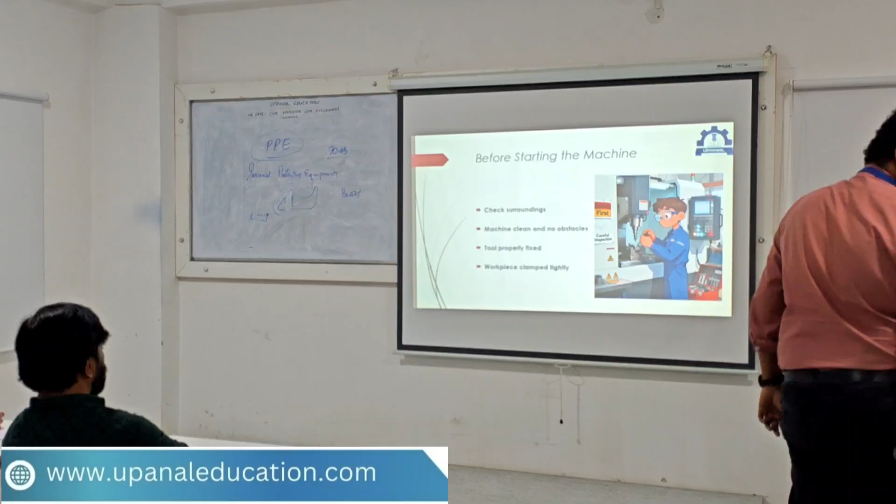Now, what should we do before starting the machine? Before we start any machine, the basic things we have to do are: first, check the surroundings. Why check the surroundings? What is the purpose? First, to see if there are any oil leaks, or any other issues. All these things have to be checked properly.

Then second thing, the machine should be clean. You might have seen the X and Y axis movement in the machine yesterday. If in that movement somewhere some chip or anything is stuck, this movement will be affected, because our machine has very fine accuracy - normally 5 micron accuracy. That accuracy will be affected if there are obstacles.

Then the tool which we load should be properly fixed. If it's not properly fixed, there are chances it may fall down, the tool may break, and the machine also may get damaged. Then we have to see that the workpieces are clamped tightly and properly, because otherwise what will happen - the cutter will come, start making the cut, and the workpiece will go its own way.

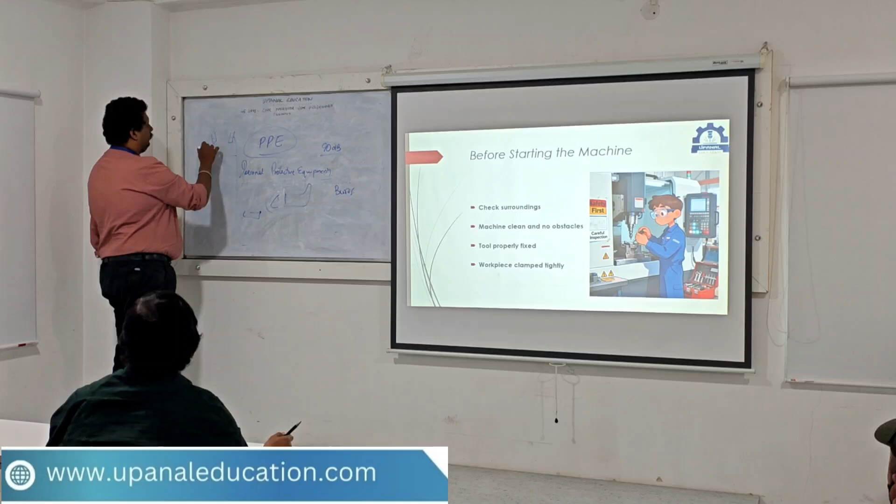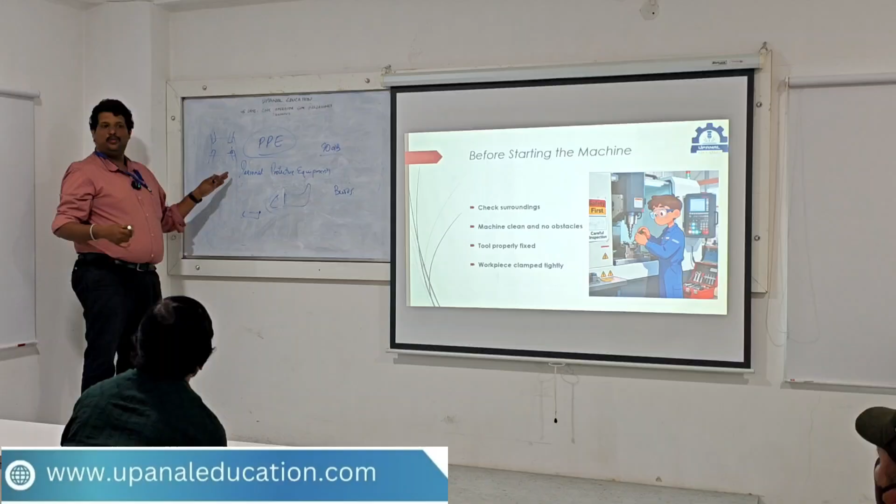Sometimes what happens? We will clamp the workpiece using clamps. But what will be the mistake sometimes? In our clamping area, the tool will have to go. Whether the tool knows there is a clamp there, the tool doesn't have any sensor. We are giving the instruction, go here, go there. Tool is following that way. When there is a clamp there, it will automatically go and hit it, and the tool gets damaged.

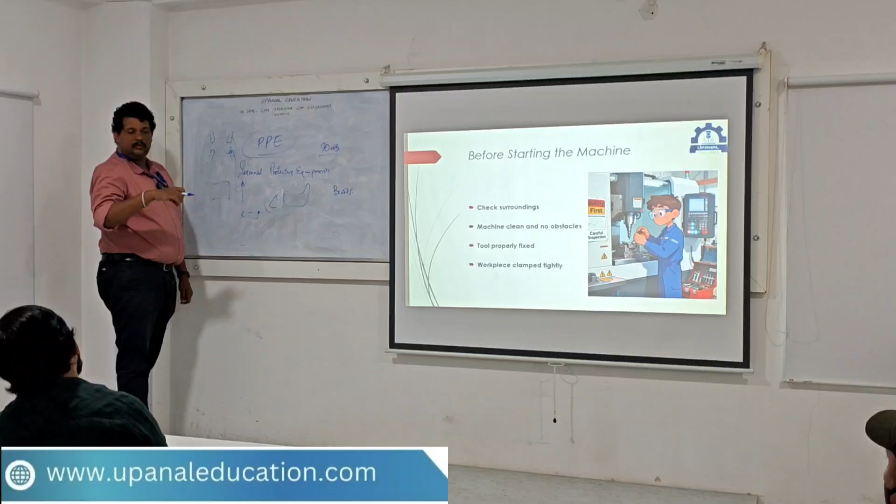Sometimes what happens? After the work, we will always lift the Z axis, so that it moves properly. There also, what will happen if you don't move sufficiently? If you don't move sufficiently, there are chances that the cutter may again break. I'll show you some videos of such errors. So these four things have to be taken care of importantly.

And what should you do during machine operations? During machine operation, when the machine is running, you have to always keep a good distance. See, how much ever we clamp, we cannot be sure. Sometimes the piece may fly, the job may fly and come to us, or even the cutter may break and come to us.

So what we will do? If this is the machine door, never stand straight in front of that. Even if the door is closed, stand to a side, with your one hand always near the emergency stop. Why? You have to be very careful about all the things. Any sound difference you feel, any vibration, anything you feel extra, not like normal.

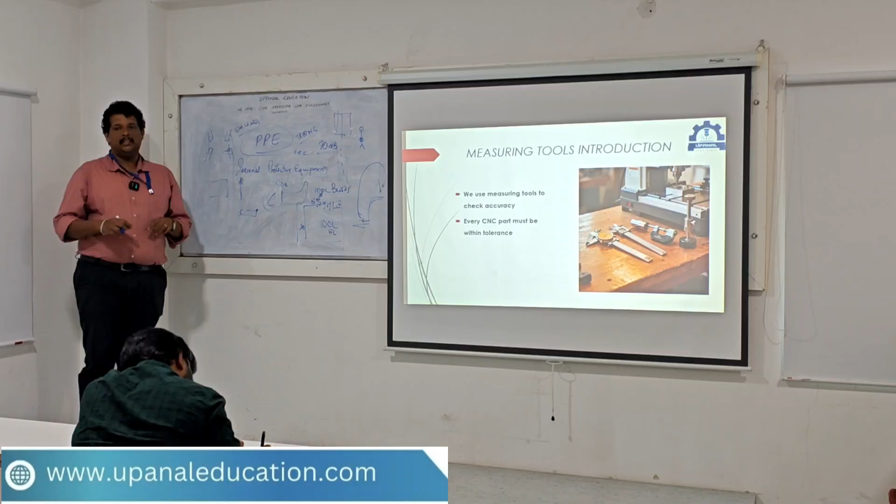Now, what is the most common measuring tool we have used? Vernier caliper - I am just asking the common thing, forget about the vernier caliper and all. Measurement tape, scale, normal scale we use. In the machine shop, we won't use a normal scale, we will be using the steel ruler, steel scale. We will be using only the steel scale, the plastic scales will not be used, we will be using the steel scales.

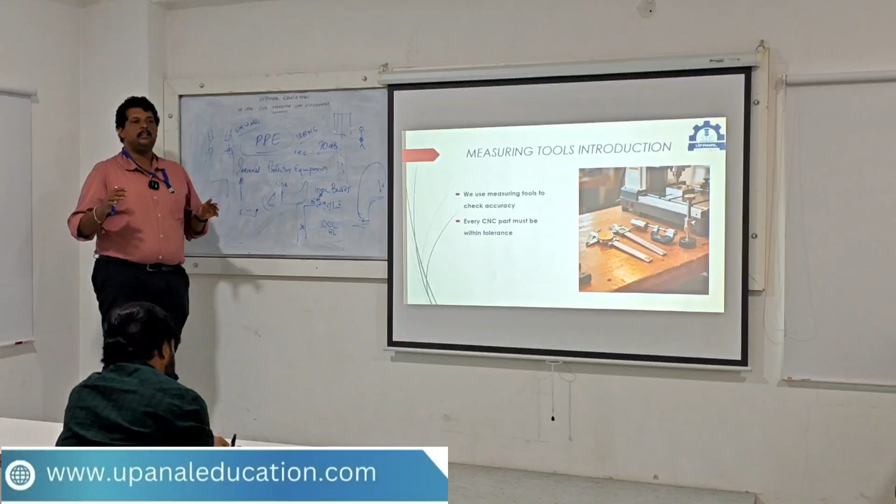So when you have a measuring tool, what we will do - how we will select a measuring tool? I want to measure something, how are we going to select the measuring tool?

Size of the work, one thing - yeah, based on size we will check. Then we are measuring the final product. If you are measuring the final product, finished workpiece, we will be using more accurate ones like the vernier caliper or micrometer or anything.

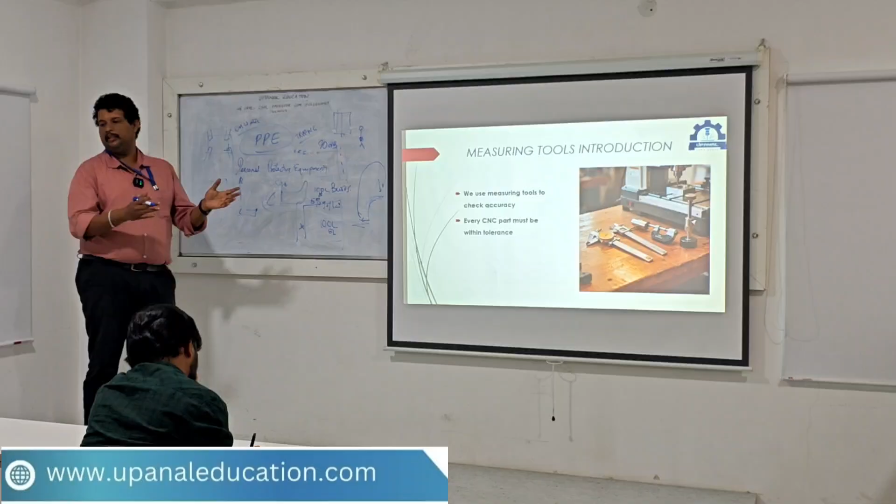But if we are just measuring the raw material - what is the raw material? The workpiece before the operation, before we start the operation. So should the raw material be accurate?

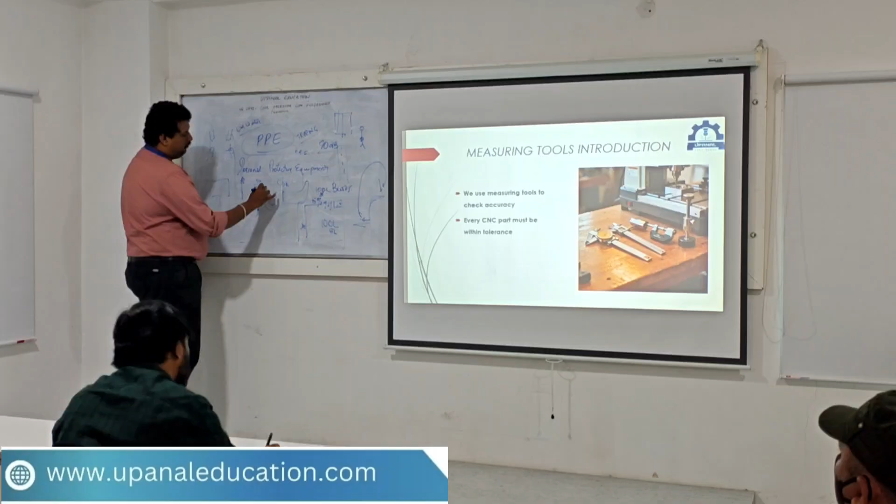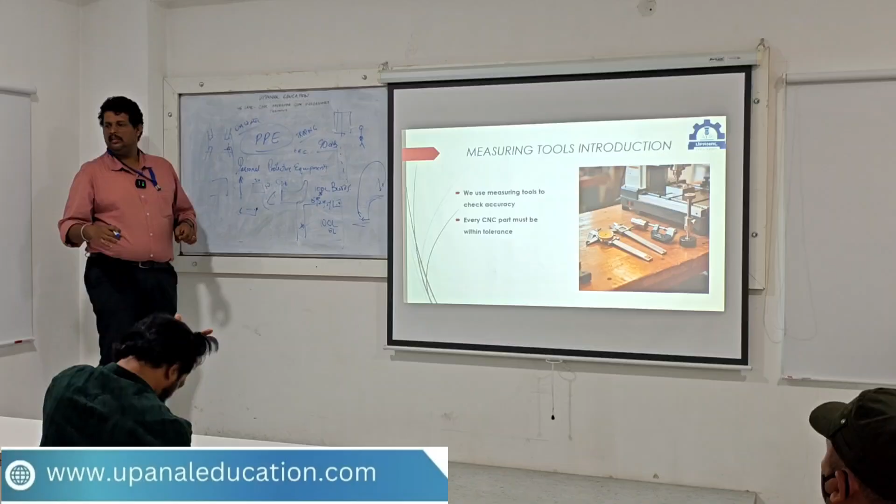So for those things we don't need a vernier caliper or anything, and we will be using the steel rule. The measurement we can take with a scale is the minimum required for this.

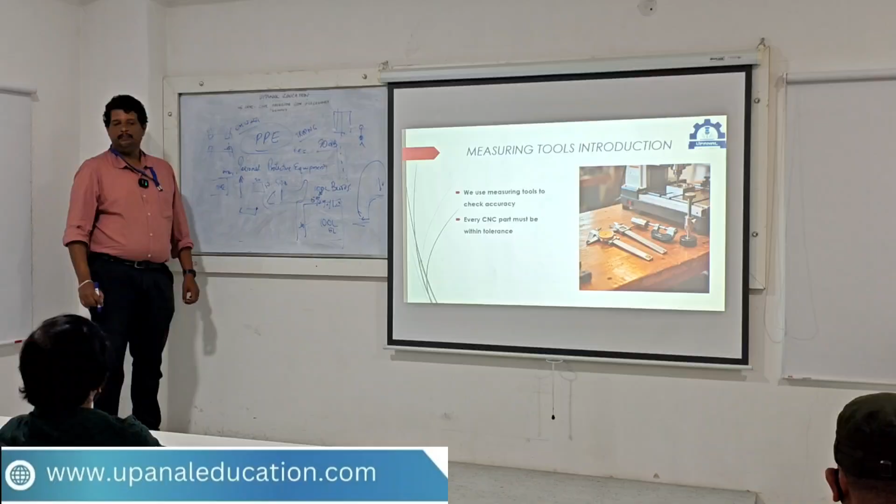Minimum, not maximum. 1 mm we can take. But in the vernier and all, the minimum we can take is 0.02. Now, yesterday I told you one thing.

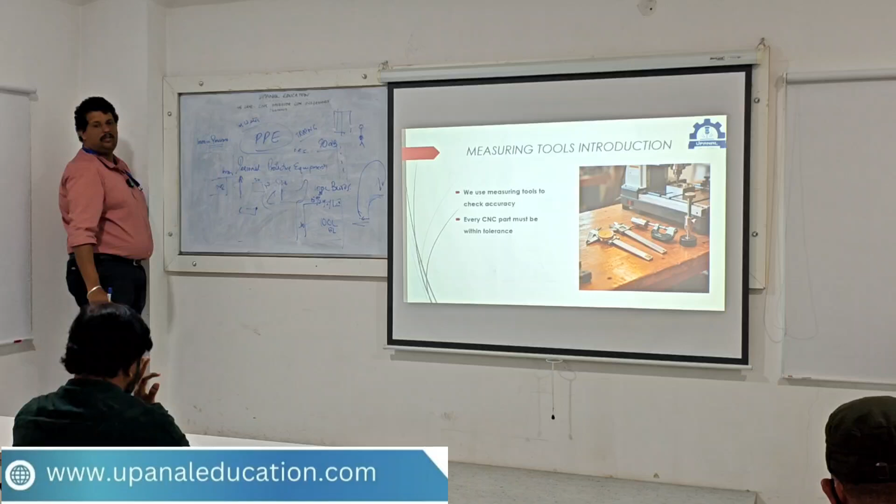Once more I am asking. 1 mm. How much microns? What is a micron? I told you yesterday about micron. Remember? 1000 microns. 1 mm is equal to 1000 microns.

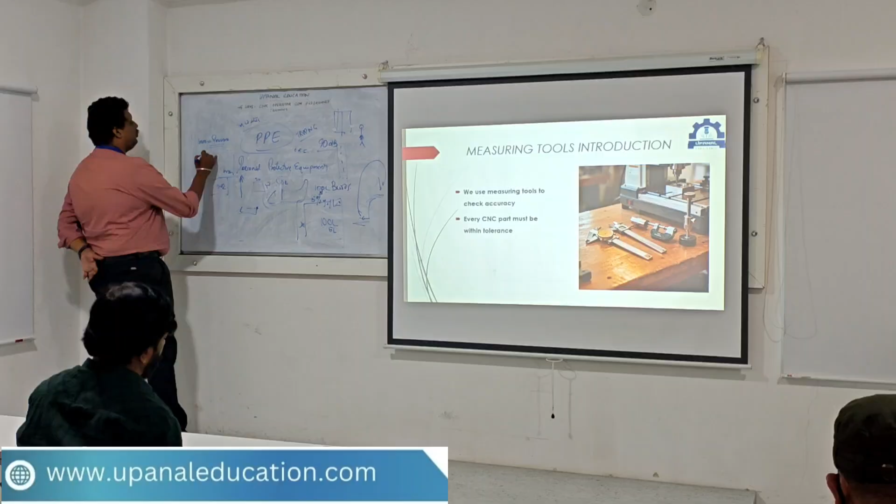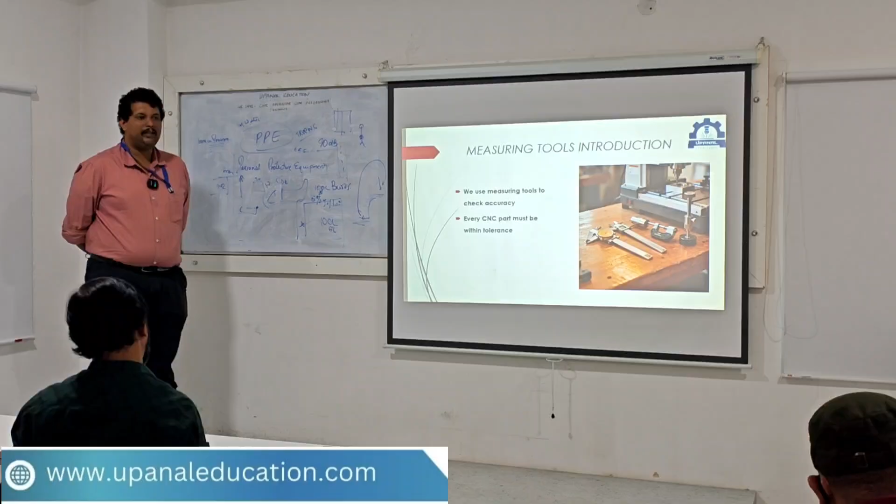Why is this word important? Why is micron important? Because when you go into the factory, when we work on the CNC, all those things we will be dealing with, they will tell the customer, we are doing work for the customer. They won't tell us we want 1 mm, 2 mm or 0.5. They will tell us we need 5 micron accuracy, 10 micron accuracy, 1 micron accuracy. When they tell 1 micron or 10 micron or 20 micron, we should not get confused. We should be knowing. So always keep in mind.

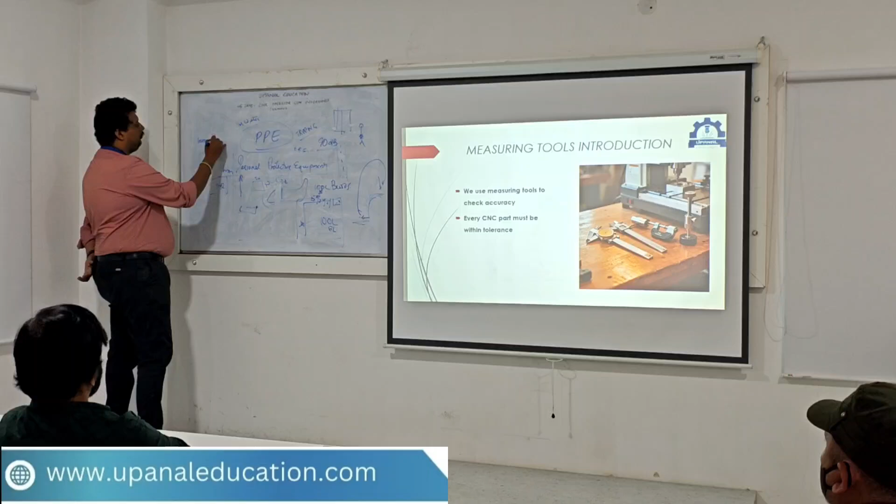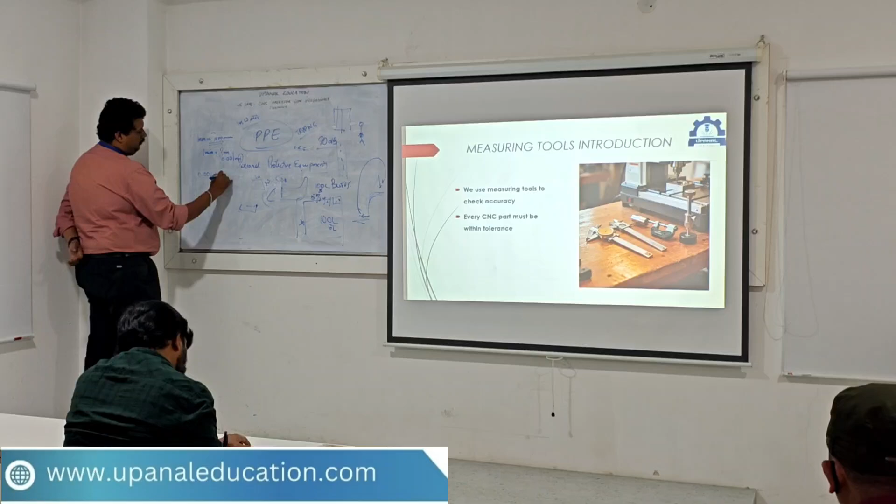So 1 mm will be... 1 micron equal to how much mm? What will be 1 micron? 0.001 mm. Okay, so always remember: 0.001 mm is 1 micron. 0.005 mm is 5 micron. 0.01 mm is 10 micron. 0.05 mm is 50 micron. Always remember this in your mind.

Because the customer will tell us, we need 10 micron accuracy, we need 5 micron accuracy, or the tolerance. There is something called tolerance. What is tolerance?

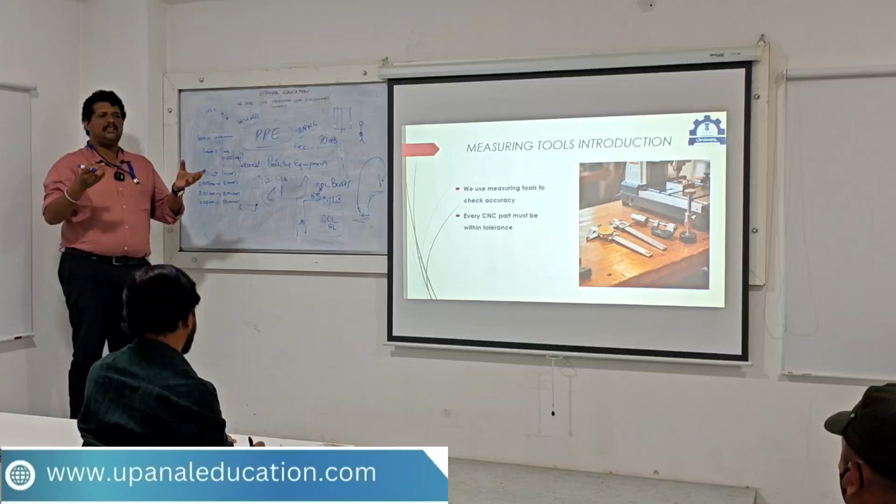See, when we are going to buy a cloth, we need 1 meter cloth. Will he be giving exactly 1 meter? There will be some 10 centimeters or 1 centimeter up or down. Will we accept it? Just 1 centimeter, in the case of cloth, not on the machine I am telling. In case of cloth, we will accept it. Hardly it is 1 centimeter, it's okay. So this 1 meter, we will be getting plus or minus 1 centimeter. This is acceptable. This plus or minus, whatever value is there, that is the tolerance we call it.

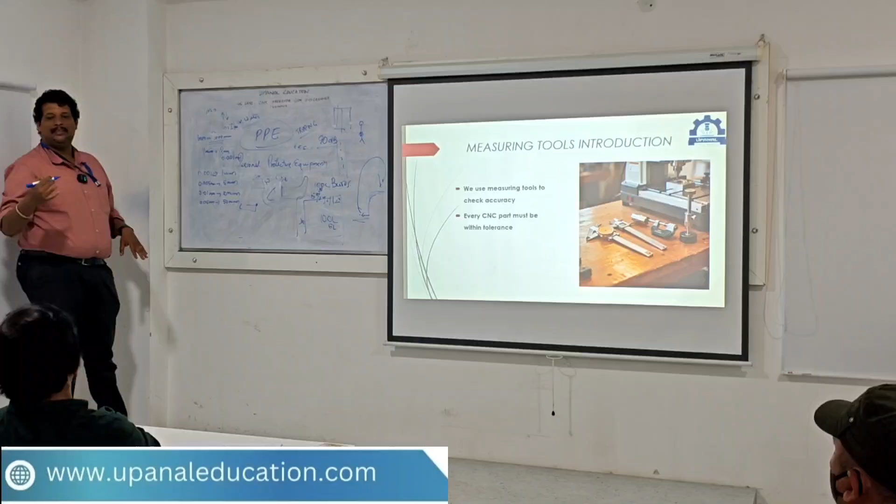But when we come to the machine or the CNC operation, this 1 centimeter will change. For example, what will be our dimension, what will be our tolerance? It will be like, for example, I'll give you an example. We had a work, my earlier company had a work. So the workpiece, the job, the dia of that was to be maintained at 1.53 mm.

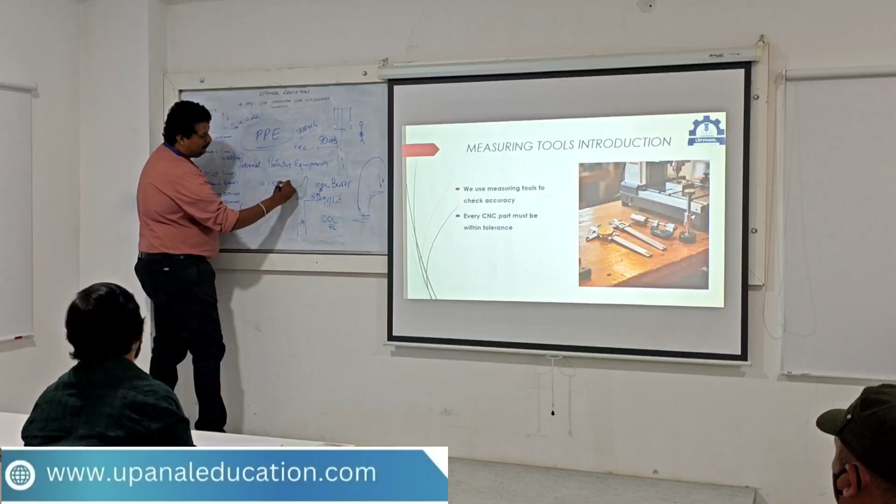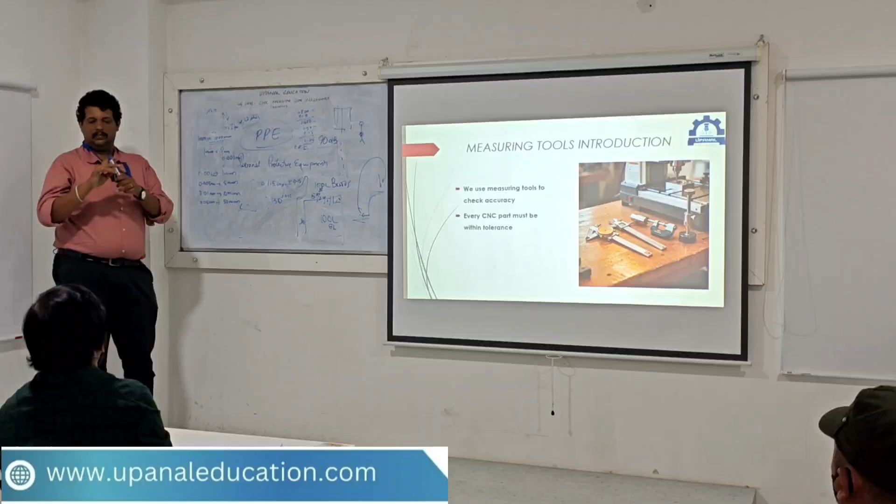Minus 0.15, how much is it? 1.35. So that means they will accept the work. When we check the dia, for example, this dia is 8 mm or 12 mm, so like that it is 1.35. They will accept the work if, when they measure, the measurement is between 1.35 and 1.65. This is known as tolerance. This is the basic thing.

We have too much tolerance, bigger tolerances. This is just for your understanding I told. Sometimes the work will have the tolerance of plus or minus 1 mm, easy for us, no need of CNC, the manual machine also we can do. Sometimes we will have 0.5, sometimes we will have 0.15, sometimes there are chances that we also have plus or minus 0.05.

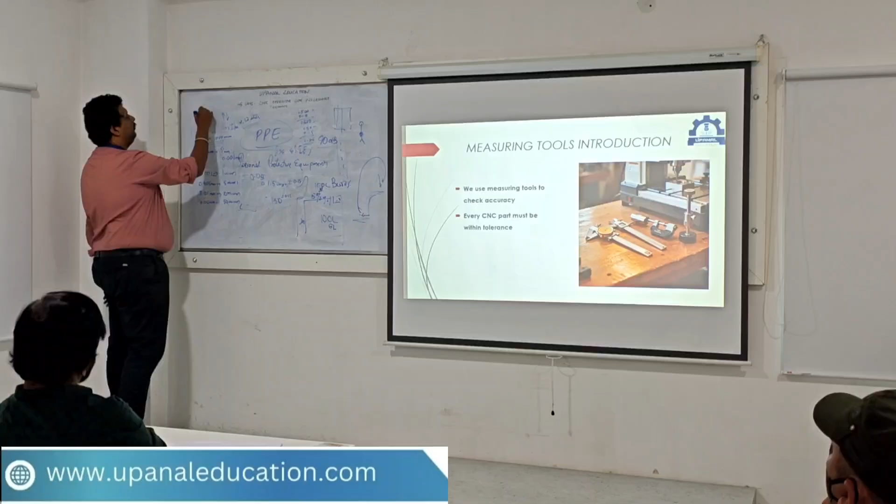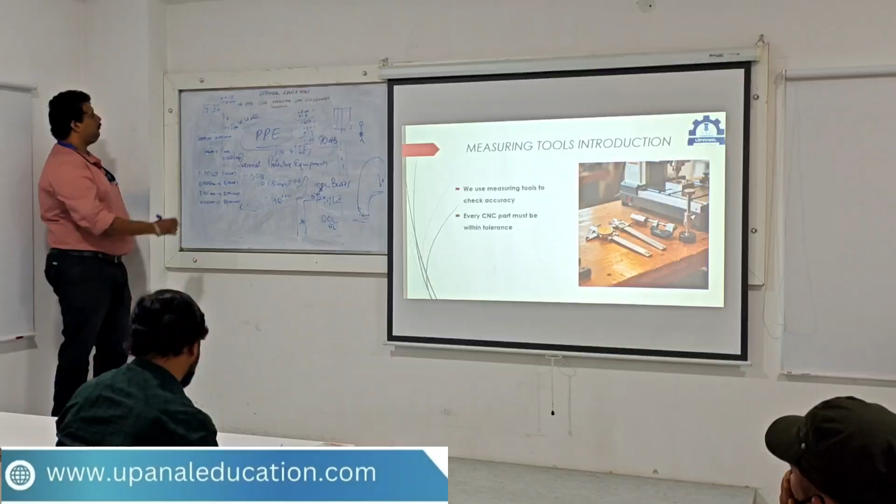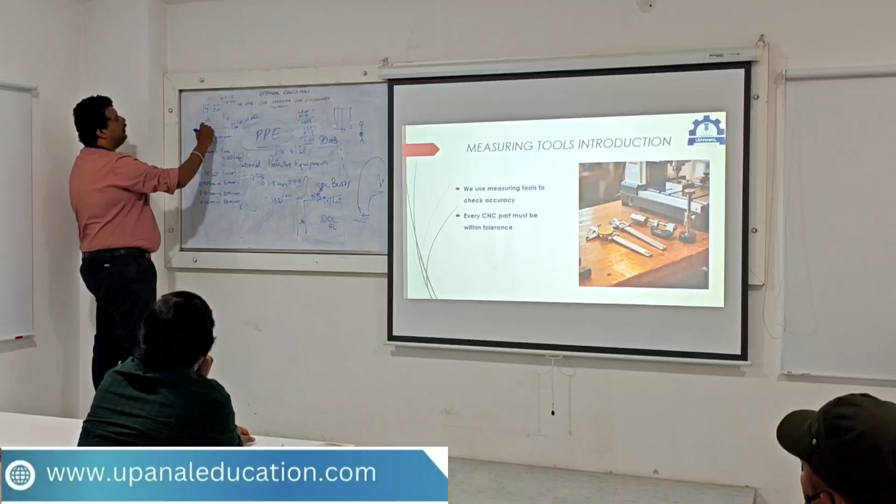And sometimes this tolerance need not be plus or minus itself. Now I wrote plus or minus. Sometimes the tolerance mentioned will be, for example, 15.32, plus 0.15, minus 0.00. Like this also we will write. If it is like this, what will happen? The accepted values, the minimum accepted value will be 15.32 itself because minus 0.00. Then maximum will be 15.47.

The work should be between these two things. So every time we have to check each piece. Without checking, can we give it to the customer? So for these calculations, we need the measuring instrument. So what are the common measuring instruments? Before that, how the measuring instruments have some classifications, we classify it into few steps. What are those? It is classified into precision instruments, non-precision instruments, line measuring instruments, end-to-end measuring instruments, direct measuring instruments and indirect measuring instruments.

So precision means exact. What do you mean by precision? Precision means exact, exact. For example, 15.32, we need 15.32 itself, that we use precision instruments for. Non-precision is scale alone. In scale, can we get 15.32? 15 we will get, or at least somehow we can say this 15.5. 15 to 16 we will say 15.5.

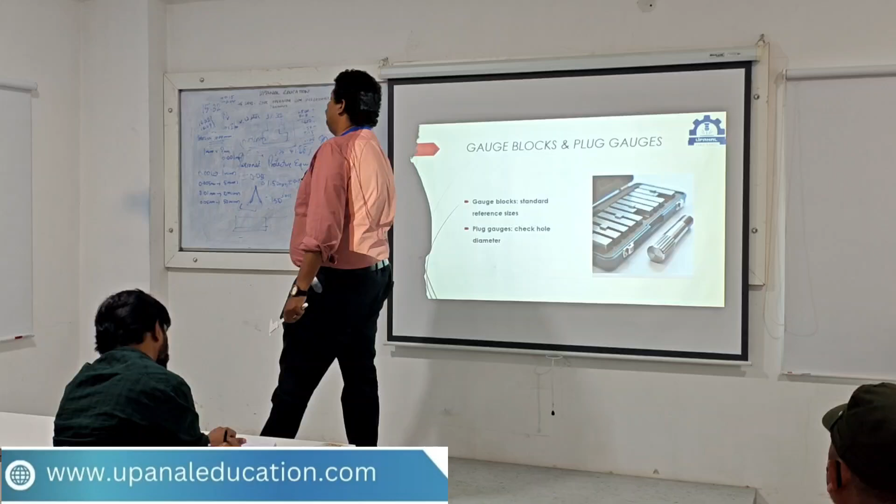Now next, gauge blocks and plug gauges. Gauge blocks are nothing but standard sizes used for calibration. Calibration means checking the size. We have the perfect standard size. For example, a block will be 20.00 mm. If the gauge block is that, it will be exactly 20.00, which we can use to compare whether the size is correct.

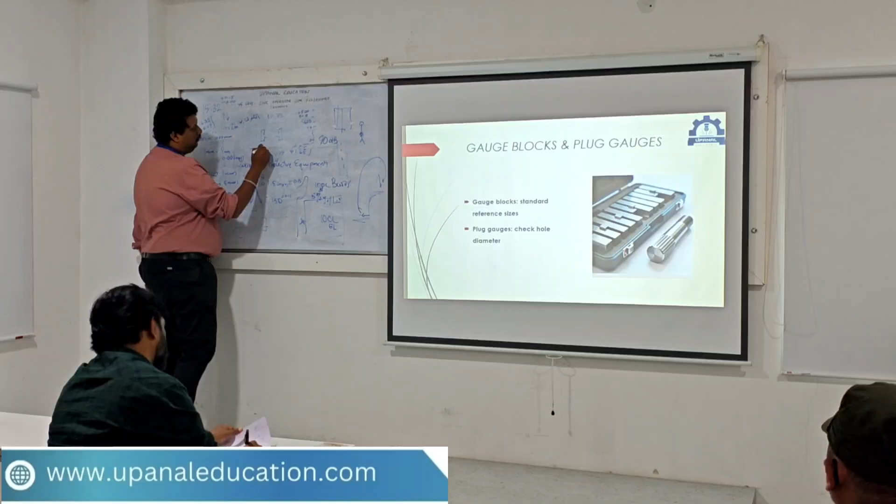And we have the plug gauges. What does a plug gauge do? A plug gauge will be an item like this. We also call it the go no-go gauge. Go, no go. So what is go no-go?

Just by hearing the word, what do you feel? You should go or do not go, right? Pass or not pass, right? For example, we have a hole.

We have a hole of diameter 12.35, and we have a tolerance of plus or minus 0.1, for example. So what will be the limits?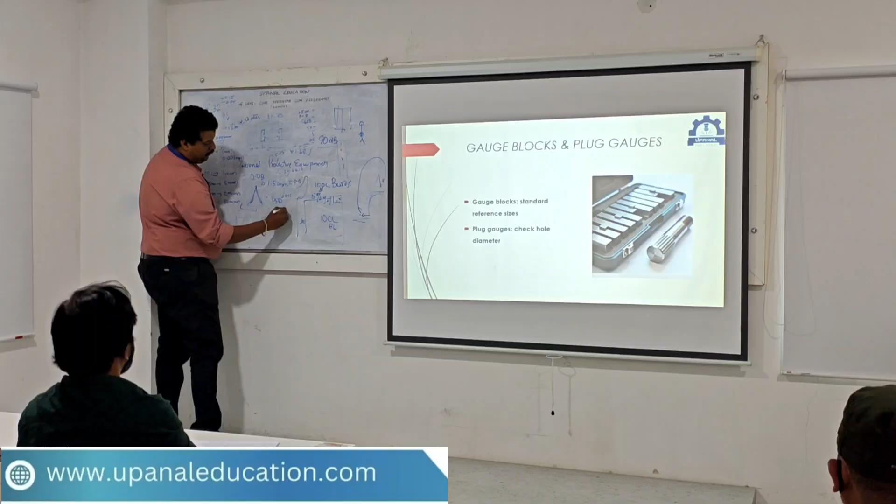It will be 12.45 and 12.25. So the hole can be from 12.25 to 12.45. Okay, so you will have a gauge. The gauge size will be exactly 12.45 and exactly 12.25. So the hole measurement will be between this.

This 12.25 will go inside, because anyway it will be more than that now. 12.25 will go inside, and then we will have a measurement of 12.45. If the 12.45 also goes inside that, what does it mean? The hole is bigger than 12.45.

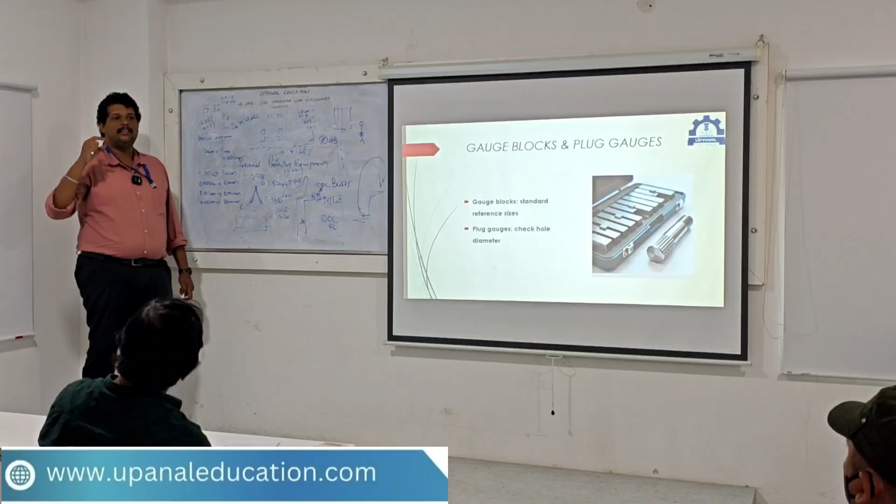12.55 is maybe the hole size. So is that acceptable? So if 12.45 goes in, it is rejected. Because every time we cannot keep on checking all the dimensions, right? So for that, what we will do? We will just use the go-no go gauge.

We put the 12.45/12.25 gauge, if it goes in, the hole is okay. We turn it, same side, 12.45 will be here, 12.25 will be here. On the back side, 12.45 we put, it is not going in. It is not going in means the hole is less than 12.45. If it is not going in, that means the hole is less than 12.45, so that is okay, that is acceptable. That is what we do with the plug gauges.

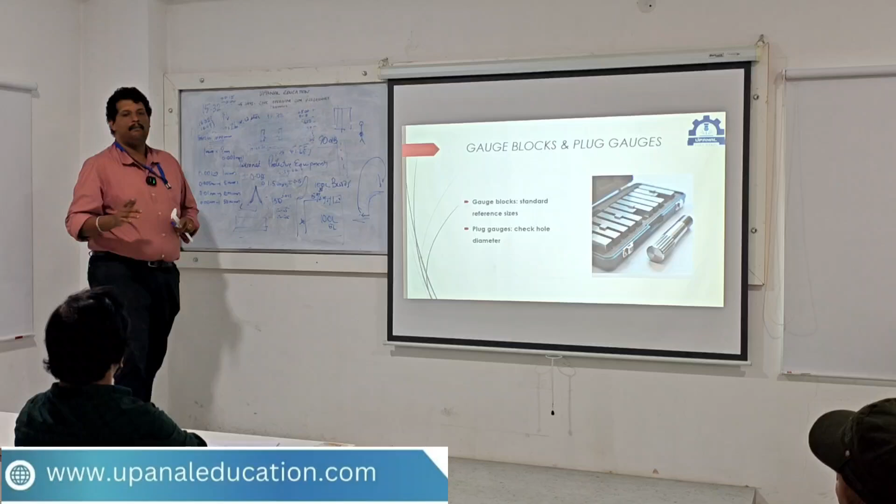Any doubts about that? Why do we use these plug gauges? Because we want to save time. Instead of measuring individually, we can save time by using plug gauges.

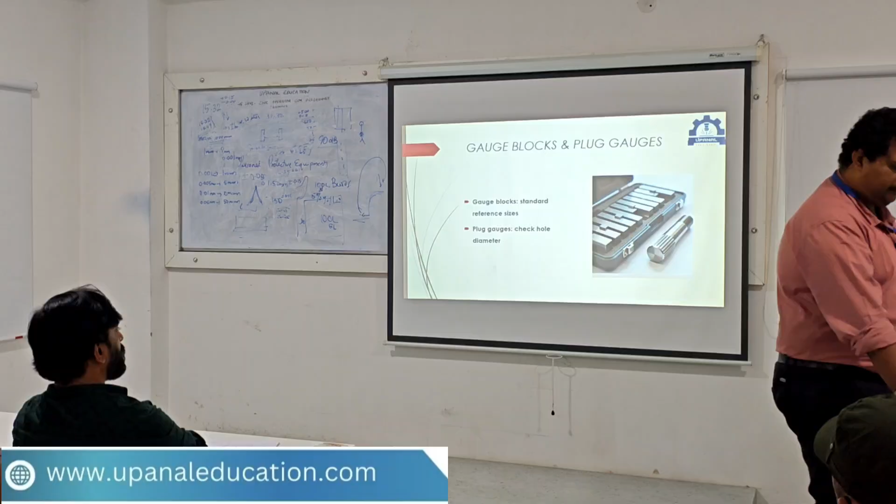Next, handling of measuring instruments. The tools have to be handled always gently and carefully. Because for example, this dial and everything, by mistake if our hand touches it, it will get damaged. A small extra pressure, the piece will get damaged.

So we have to always hold it gently and firmly. Sometimes holding it tightly can damage it, or if you don't hold it properly, it may fall. So let's hold it properly. Then do not drop them. Never drop your tools.

What is zero error? See, for example, in a vernier caliper, I told you we have two parts, right? This moving part is there and fixed part is there. There will be a zero in the fixed part, and there will be a zero in the moving part.

The zero of the fixed part and the zero of the moving part should always be close together, on the same line. If it is not, that means there is an error.

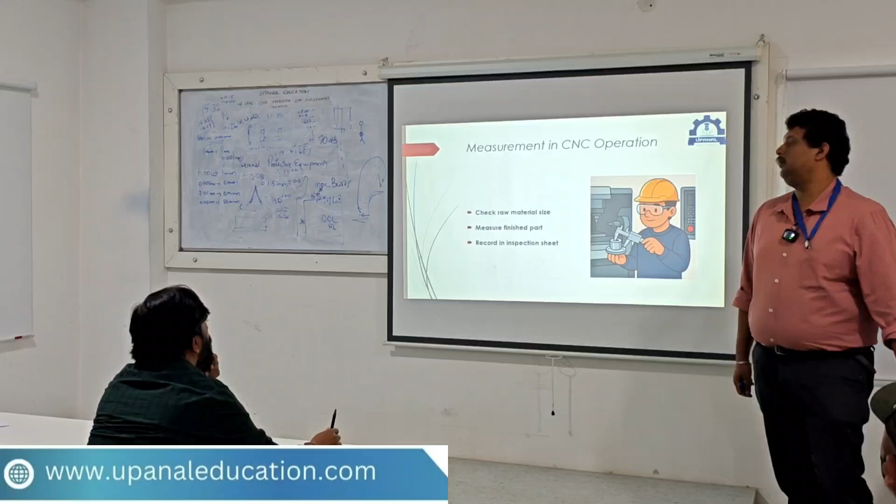Now in the CNC, what are the things we have to check? Mainly, whenever you are doing work in a CNC machine, you have to note the raw material size. It is the best practice, which is not much followed, but whenever you are doing a program or a product, always note, always write down what is the material, what is the raw material used, then the raw material size.

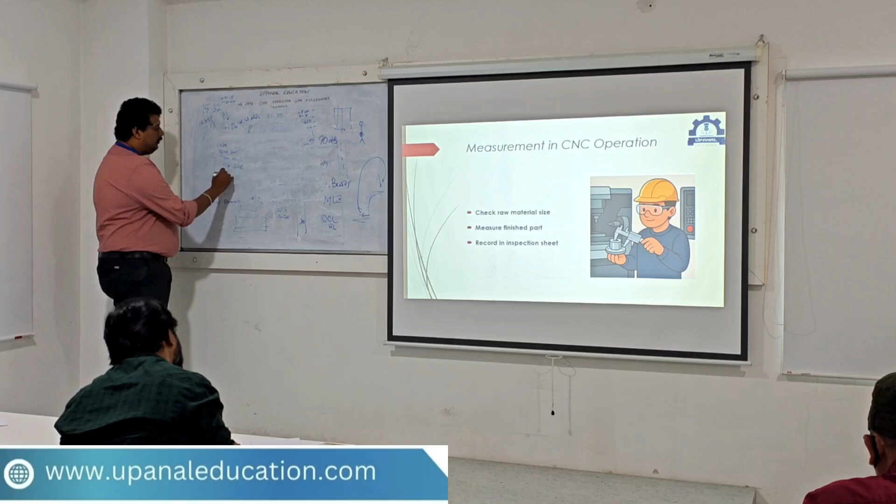Then which is the tool used, then the finished product size. You have to mention the total time taken, and what is the program number used. Every program will have a number, that number, what is the number?

This much you have to write. If you want, you can add more also. Why? Because we are doing work today. Maybe your supervisor or someone senior, normally they will ask, hey, what happened to that work you did last month? They won't ask tomorrow what we did today.

They will ask only next month or maybe after many days. So at that time, what can we do? We can check the book. We have our record: sir, this was the thing done, it took this much hours, this much minutes, this was the raw material used, this was the raw material size, this was the final size. So even if your company doesn't tell you to maintain it, you have to maintain the book.

Maintain the book, and mention what is the raw material type used. Because in CNC I told you what materials we can machine. We can use plastic, ABS. We can use MS, OHNS, steel materials. We will use copper, we will use brass. We can do silver, we can do gold.

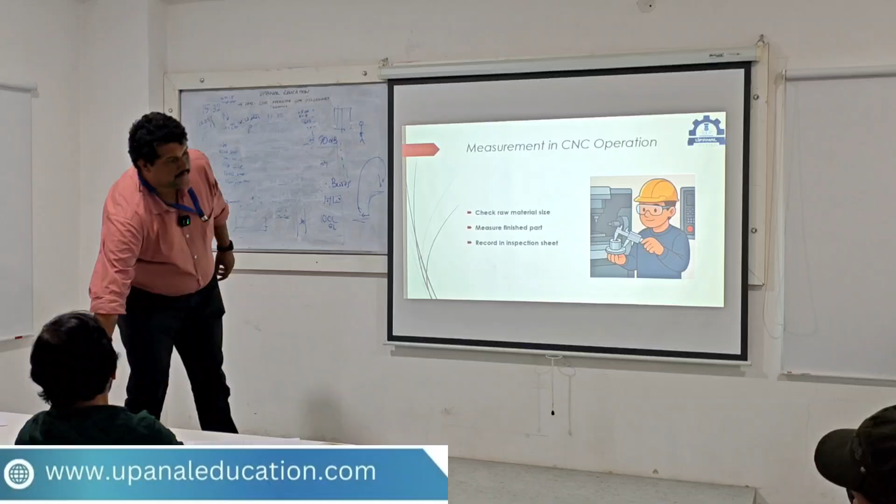Understood? Understood? I'll just show you. So this was regarding safety and the measuring instruments. From tomorrow you'll be going into the main CNC aspects - what are the axes, how to operate, all those things. Let me see about the machine, I can show it there also.

Now I will show you a video of how the tool change happens. I told you the tool may change automatically, right?